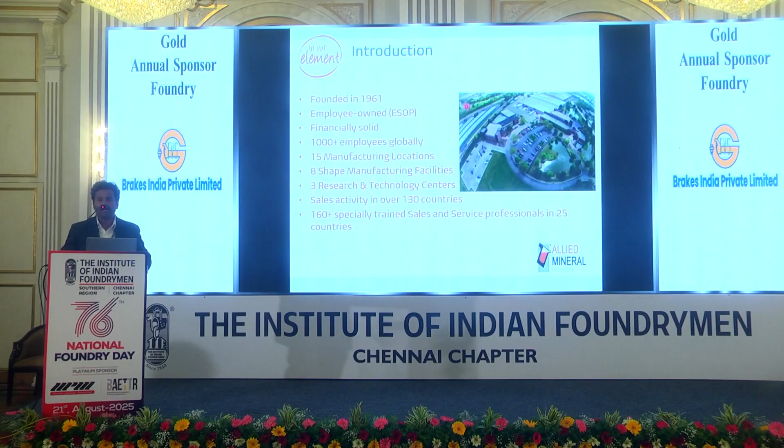To brief about Allied Refractory Products - Allied Refractory Products is a wholly owned subsidiary of Allied Mineral Products USA. It was founded in 1961, it's an ESOP company and financially solid. We have more than 1,000 employees globally, 15 manufacturing locations and 8 shape manufacturing facilities, and 3 R&D facilities. We have sales activities over 130 countries, and almost 160 trained sales and service professionals across the globe.

So what are ladles? Ladles are pieces of equipment used to hold and transfer liquid metal. Traditionally, these ladles are not given much importance, which they should be given. These ladles are often lined with traditional practices like bricks and mortars, sand and sodium silicate, sand and CO2, and sometimes fire clay.

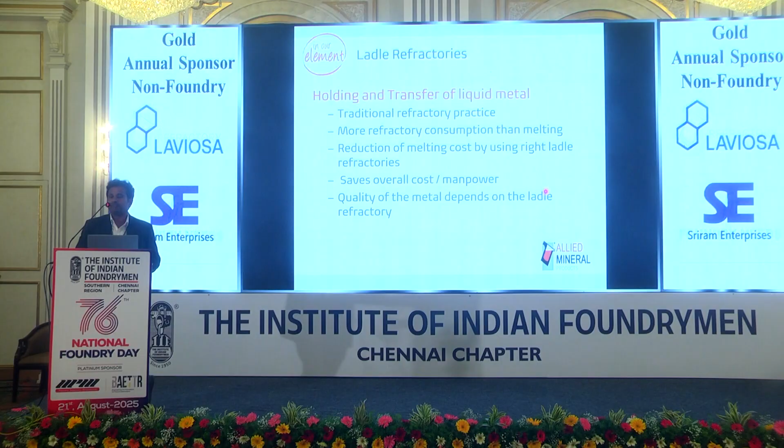If you see, more refractory consumption takes place in the ladles compared to your induction furnaces. If we actually concentrate on these ladles, we can save a lot of overall cost, we can reduce a lot of manpower, and in fact we can increase the quality of metal because the ladle is the last point of contact of your metal before the molds.

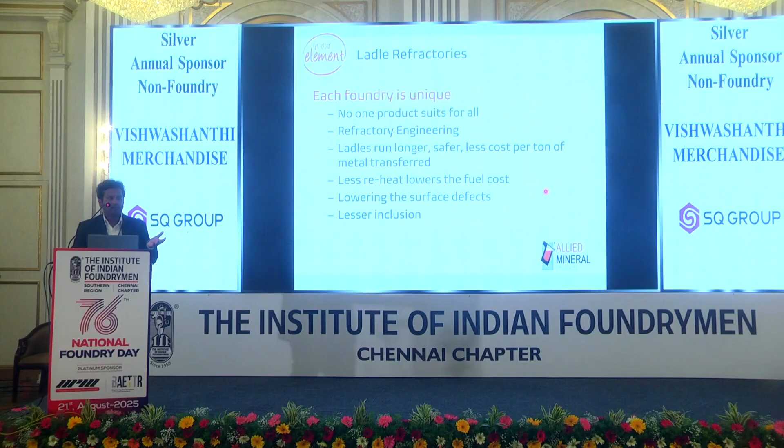Each foundry is unique, so there is no one product that suits all. Let's say you have a different kind of metal - you need to use different refractories according to your metal chemistry, slag chemistry, and operations. These refractories have to be engineered properly to run longer, to run safer, and at less cost per ton of liquid metal transferred. Further, it has to have less reheat, which lowers your fuel cost, lowering surface defects and inclusion defects in your castings.

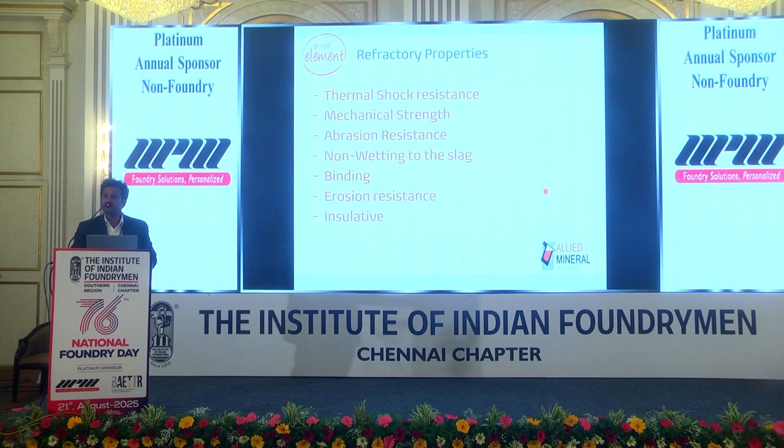In the next segment, we'll see the main important parameters or properties required for your ladle refractories. The first ones are thermal shock resistance and mechanical strength, abrasion resistance, non-wetting properties, binders, erosion resistance, and insulation properties. We'll see each property in detail.

Thermal shock resistance is the first and foremost important property of your ladle refractory. When you consider the induction furnace, as soon as you tap out the metal, it is always in hot condition. Whereas in the ladle, you will be transferring the metal and the ladle will be idle, exposed to the atmosphere. There is a huge, enormous amount of thermal shock involved compared to the induction furnace, so our refractory should have more thermal shock resistance. Thermal shock resistance is nothing but a property to withstand sudden and rapid temperature change without cracking or failing.

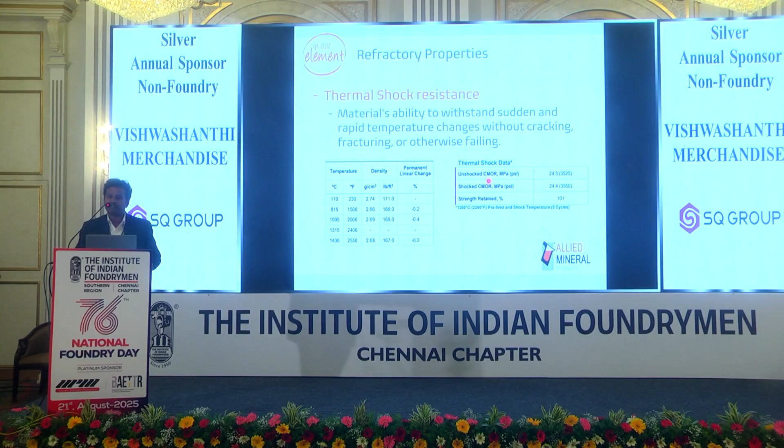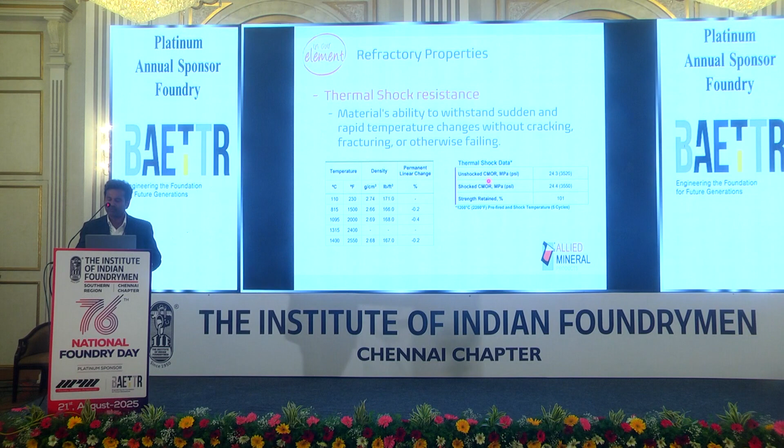There are two data points in the properties to know whether a product is thermally stable or not. One main property is the thermal shock data. Some products are given this data directly, some may not be, so we have to indirectly interpret whether the product is thermally stable. One particular parameter is the unshocked CMOR - MOR meaning modulus of rupture, which is a property of a material indicating the maximum tensile strength it can withstand upon bending. This test can be done either in cold or hot condition.

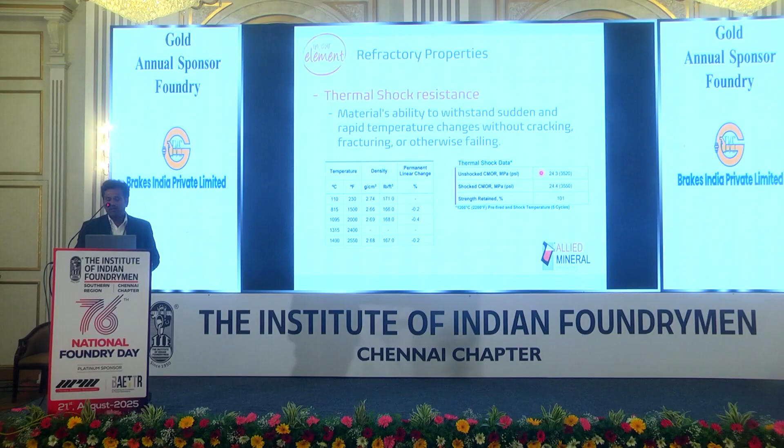This sample has been analyzed unshocked and has a CMOR of 24.3 megapascal. This specimen has been cycled 5 times around 1200 degrees Celsius, and again this test was conducted to see the MOR. The difference is not much, meaning the product will withstand thermal shock - the strength retained is almost 100%. So this product is thermally stable.

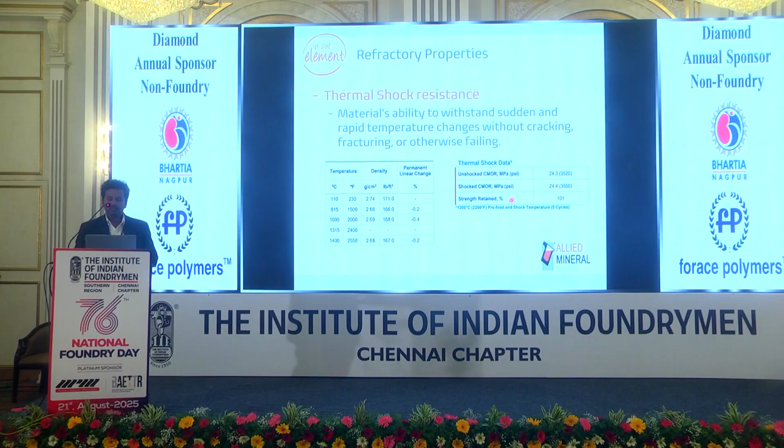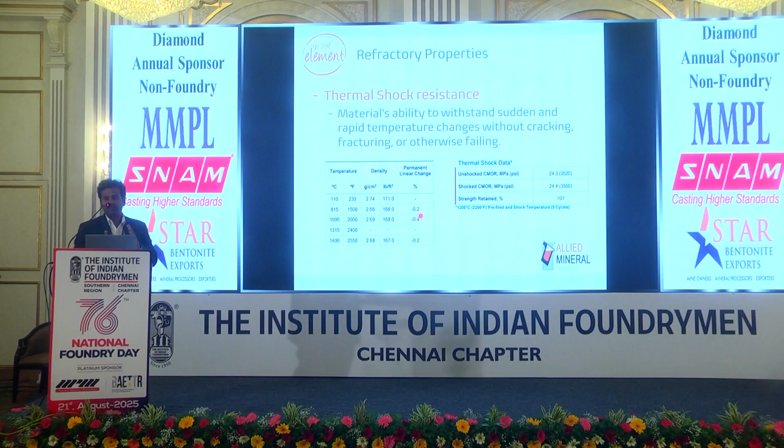If you don't have thermal shock resistance data, we can indirectly derive it from the permanent linear change data. If you see this particular product around 815 degrees Celsius and 1095, the permanent linear change is negative 0.2 to negative 0.4. Generally, a product is stable if this difference in permanent linear change is less than 0.3 - here it's just less than 0.2, so this product will perform better. This is the indirect way of deriving thermal shock resistance.

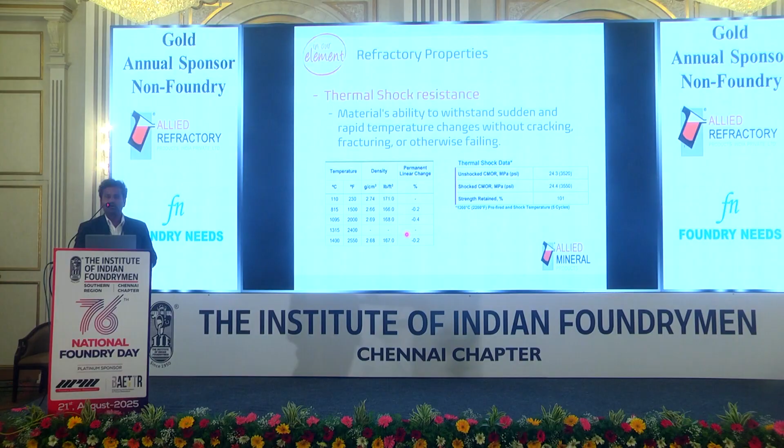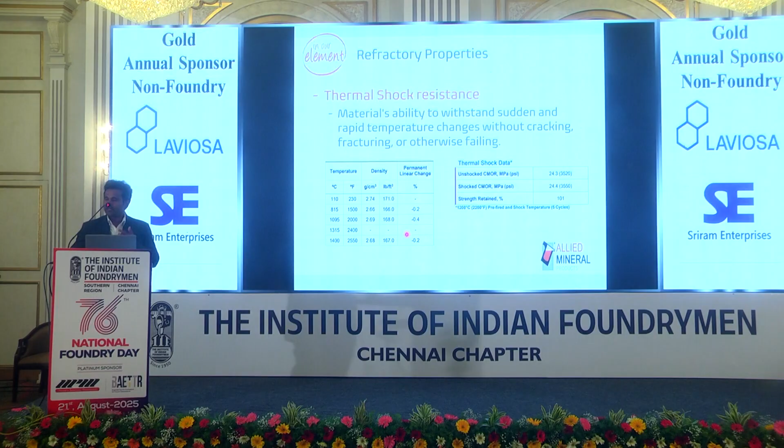Our traditional refractories like bricks and mortars - basically bricks have many joints, 6 joints. When you do the thermal shocking, these joints have a chance of opening up and metal can get penetrated through them. So we need a proper engineered refractory system in the ladles which can sustain this thermal shock, along with good mechanical strength.

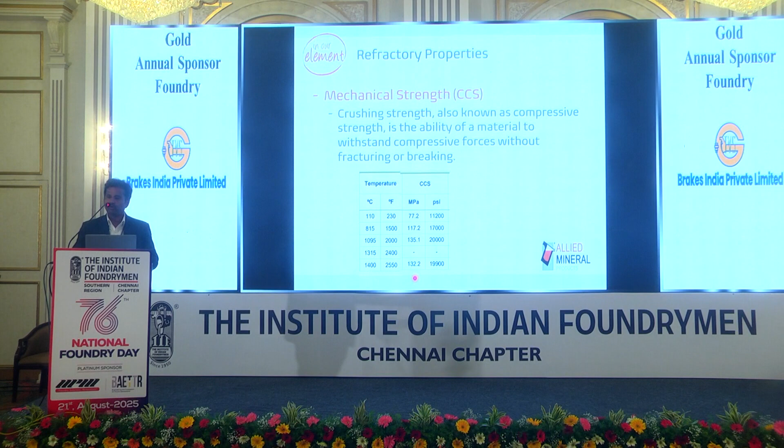This mechanical strength can be calculated from cold crushing strength. CCS is known as compressive strength - the ability of a material to withstand compressive force without fracturing. If you see this particular product, it has the highest cold crushing strength around 1095 degrees Celsius, around 135 megapascal. So we can analyze whether this product is mechanically strong, because ladles of bigger sizes like 5 ton, 10 ton, 20 ton and so on hold a huge amount of metal. It has to have good mechanical strength to hold that particular amount of liquid metal.

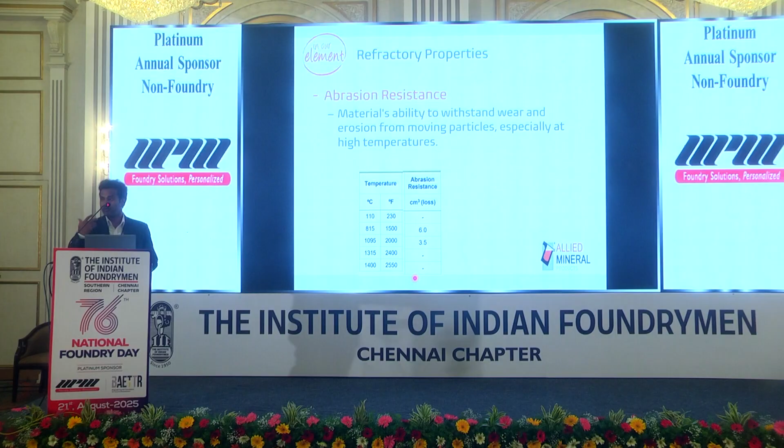The third property is abrasion resistance - the material's ability to withstand wear and erosion from moving particles, especially at high temperature. These ladles generally get a lot of abrasion to remove slag deposited in them, and sometimes if metal is getting solidified, you have to give a lot of abrasion force to remove the solidified metal. So this product has to have good abrasion resistance. In general terms, this abrasion loss will be given in the data sheets - if it is less than 6, it's considered a good abrasion resistant product.

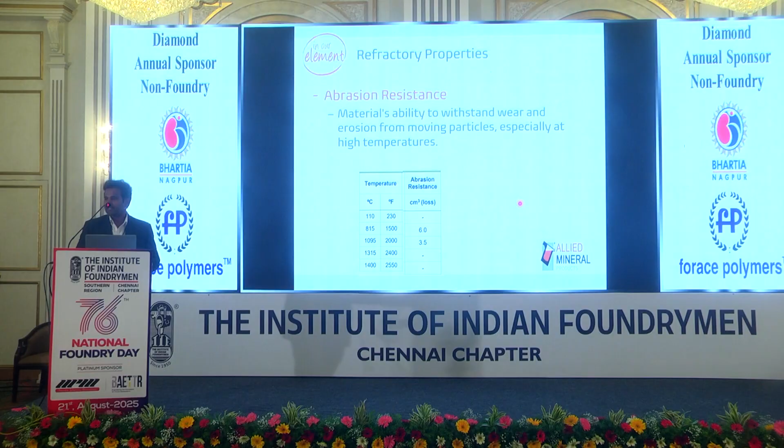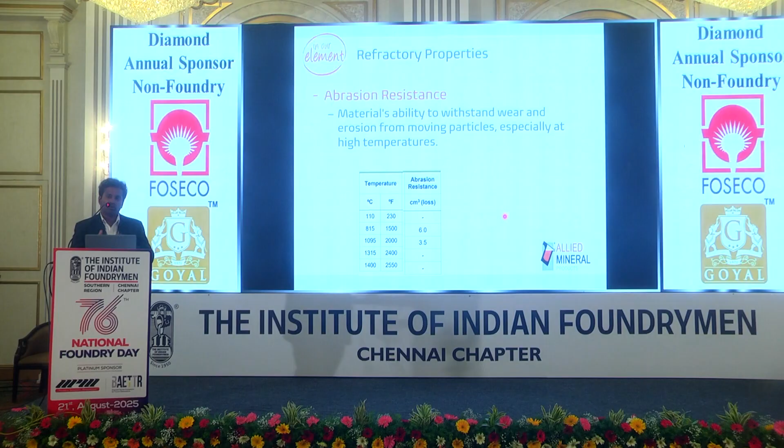Sometimes all the important data parameters may not be given in the data sheet, so we have to correlate with other properties to get an idea. You can correlate abrasion resistance with cold crushing strength - if this product has higher cold crushing strength, it is directly proportionate, meaning it has good abrasion resistance.

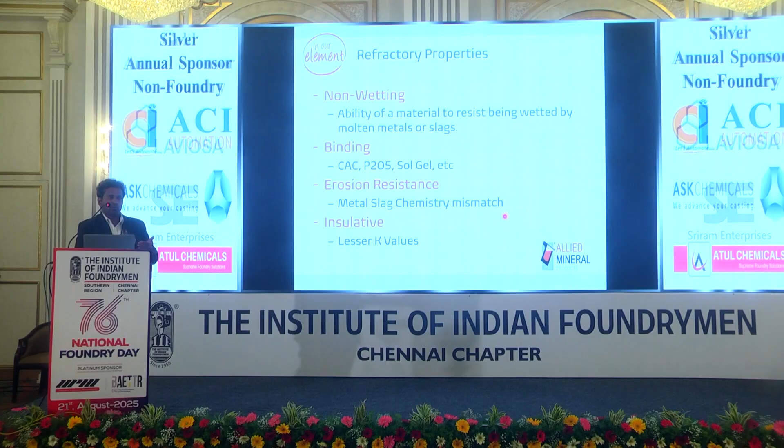So another major important property is the non-wetting agent. Apart from the aggregates, there are certain additives being added to the refractory system which resist the liquid metal or the slag from adhering to the main working lining, so that you will have the same volume of your ladle for a longer period of time.

Another property is the binding agents. What kind of binding system are we using in your ladles? Either it's a calcium aluminate cement or phosphate bonded, or sol-gel technology like colloidal silica, etc. These binders are important because it depends upon the application. For example, you're going to patch your ladle, and it has already been lined with a calcium aluminate system.

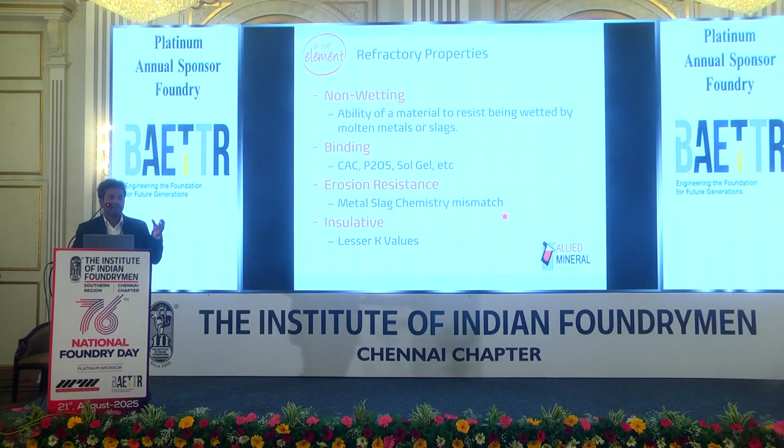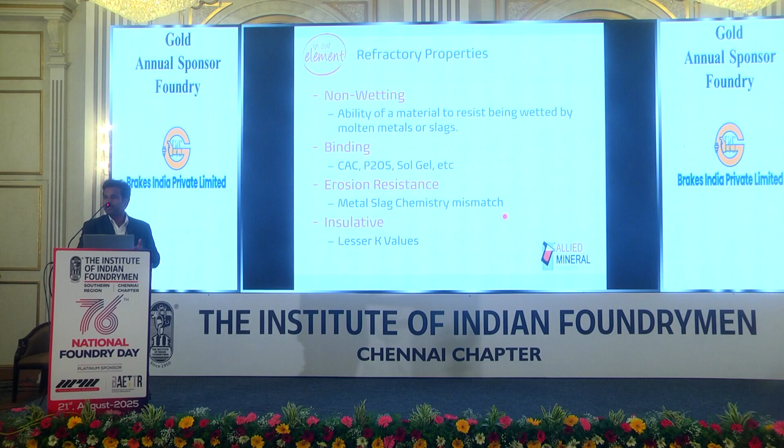You cannot again use the calcium aluminate system for patching purposes, because already fired, dried refractory will not adhere to the new castable system. So in that particular case, you have to use a phosphate bonded system, which will adhere to the old dried refractory in a much better way compared to the calcium aluminate cement system.

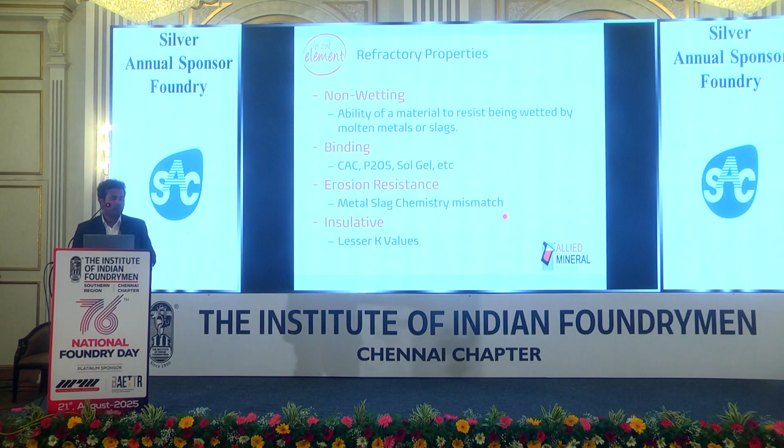Another property is erosion resistance. Your refractory should not erode either in a chemical way or a mechanical way. If you are using a bigger ladle, like 5 or 10 ton capacity, the liquid metal stream will be falling from about 3 or 4 meters height, so the bottom of your ladle gets eroded faster. So your refractory should have better erosion resistance.

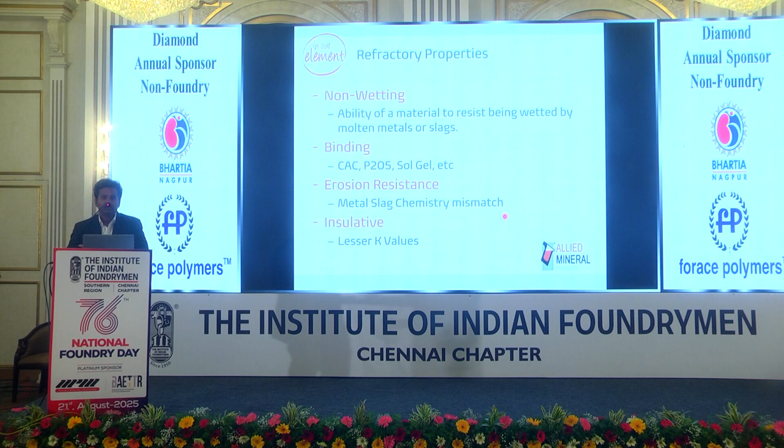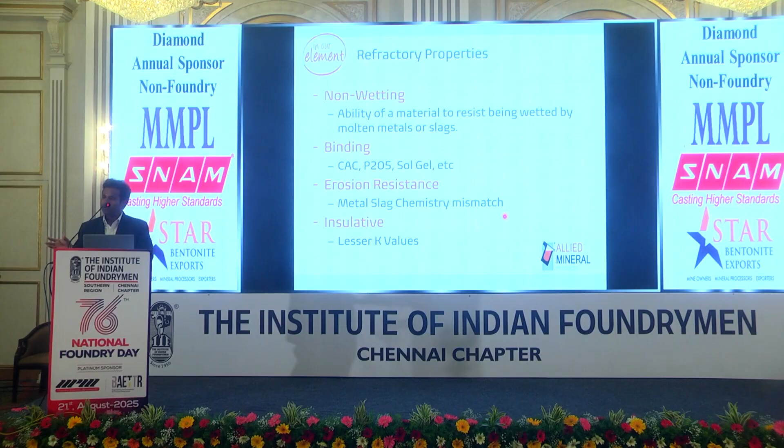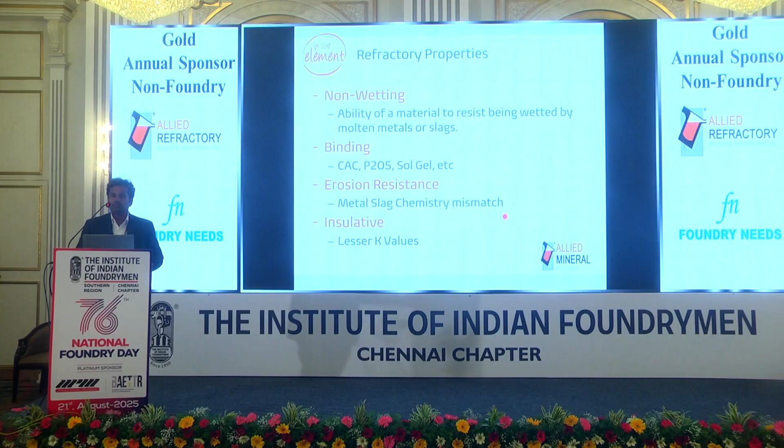Generally speaking, if you have a silicon carbide additive in your refractory, it will have better abrasion resistance and mechanical erosion resistance. You also have to use a refractory which is compatible with your metal chemistry. You cannot use a chemistry which is not compatible with your metal and slag, otherwise you will have chemical erosion. And obviously, your refractory should have a very low K value so that your ladle can hold the temperature for a longer period of time.

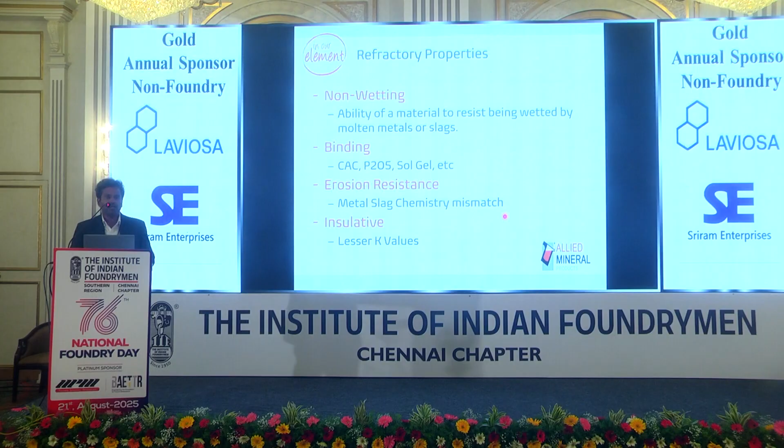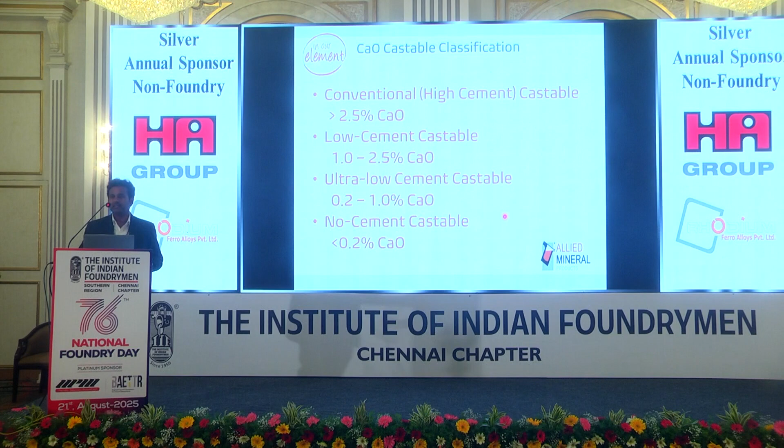So far, we have seen the main important properties required for ladle refractories. Now we'll see the classification based on cement content. For a long time, people have used high cement castables, called conventional cement castables, which have more than 2.5% calcium oxide. This is very easy to use, and people are very fond of it. They can mix it with any amount of water and easily trowel it onto any surface. As I said earlier, there is no one product that suits all applications.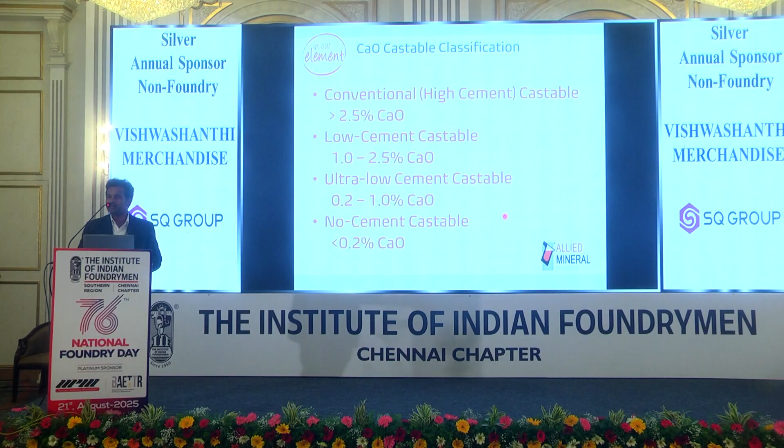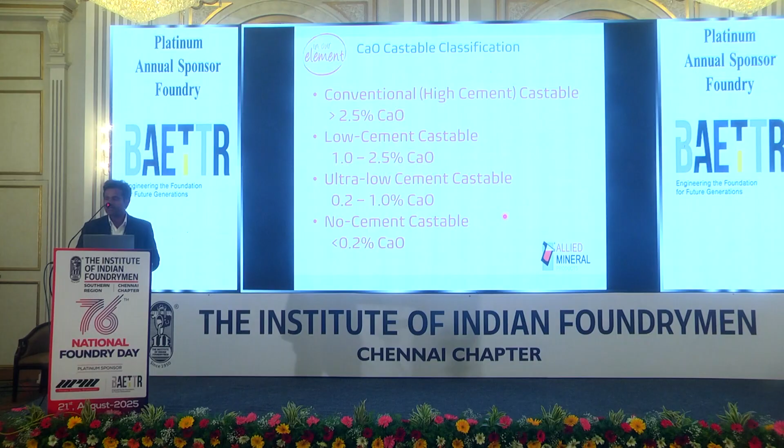The second is low cement castable, which has very little, like 1 to 2.5% calcium oxide. It takes very minimal water. There is another category called ultra low cement castable, which is about 0.2 to 1% calcium oxide. And the final category is no cement castable, which uses a completely different binding system like phosphate bonded or colloidal silica.

High cement based castables require less intensive mixing and a high level of cement. When the cement level is high, obviously the water percentage will be more. So the density goes down, and a lot of water is in the system. It's always difficult to remove all the water from the system, and it has very low strength.

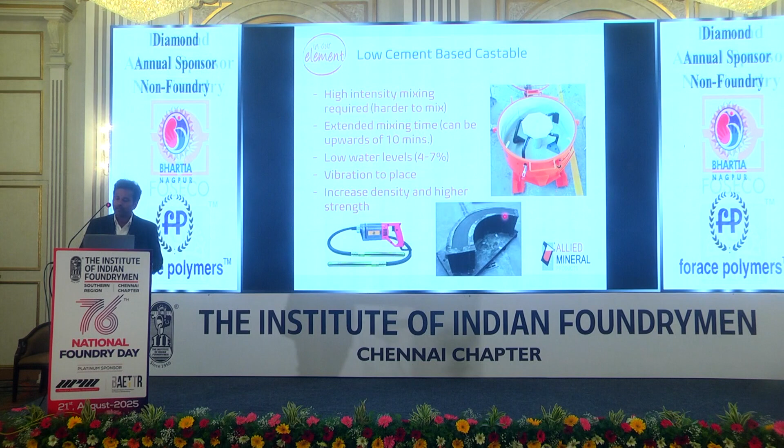On the other hand, the best suitable system for your ladle refractories is low cement based castables. Even though it requires some specialized equipment like a pan mixer and needle vibrator, the product has to be installed the way it has been designed. Certain products are designed only for vibration casting, and if so, it has to be used with a pencil or needle vibrator.

Compared to high cement refractories, low cement refractories need a shear force to mix properly. That's the reason we always recommend a pan mixer. It cannot be mixed by hand. When you try to mix a low cement castable by hand, you tend to add more water, which ultimately reduces the density of the product, reduces the strength, and gives a shorter lining life.

This chart gives a general idea about the cement percentage, porosity percentage and strength. High cement has a very high porosity level and very low strength: 15 to 30 megapascal, and 3 to 7 megapascal modulus of rupture at 1100 degrees Celsius. Low cement has 70 megapascal, and with ultra low cement you can achieve strength up to more than 130 megapascal.

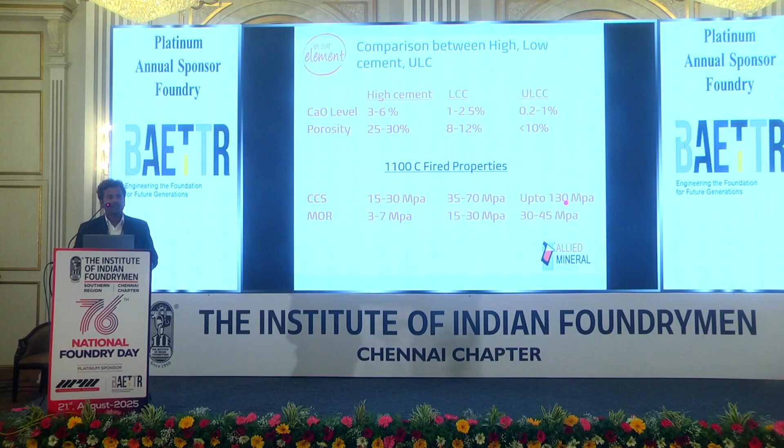At the same time, we cannot use ultra low cement for all applications, because it contains special raw materials and special additives, so it may be expensive. We have to think and decide the product according to the needs.

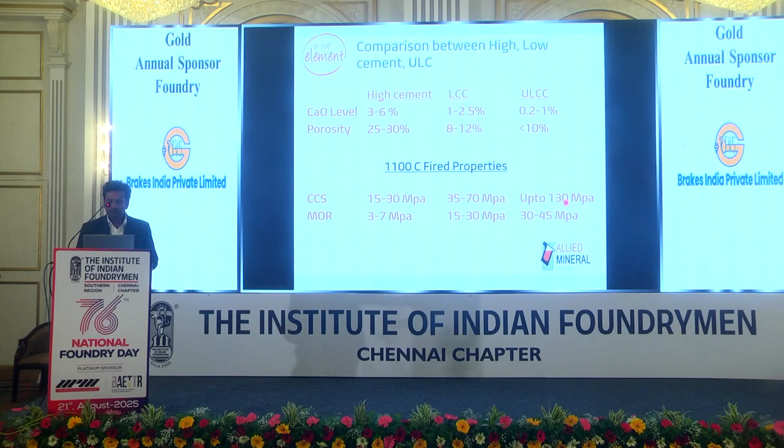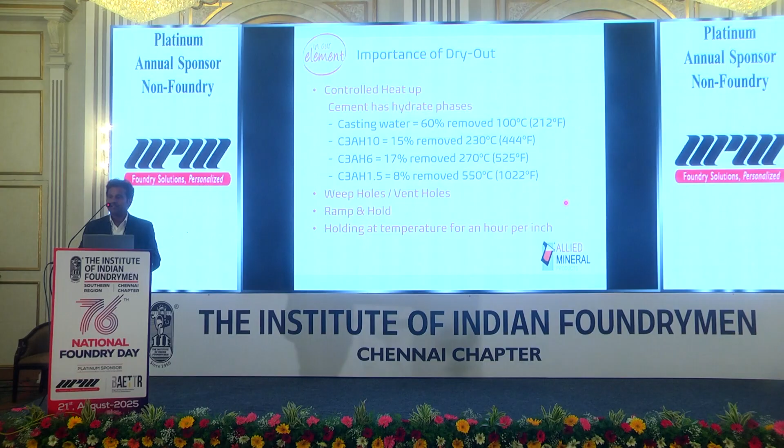When you see the calcium aluminate cement based castable system, one major part is the dry out. Whatever water we add has to be removed without damaging the refractory system. The physical water we add, 4 to 7% in a low cement system, will come out around 100 degrees Celsius as water vapor. But it is not the same. Traditionally, people used wood firing and some other systems, but it is not sufficient to drive out all the moisture.

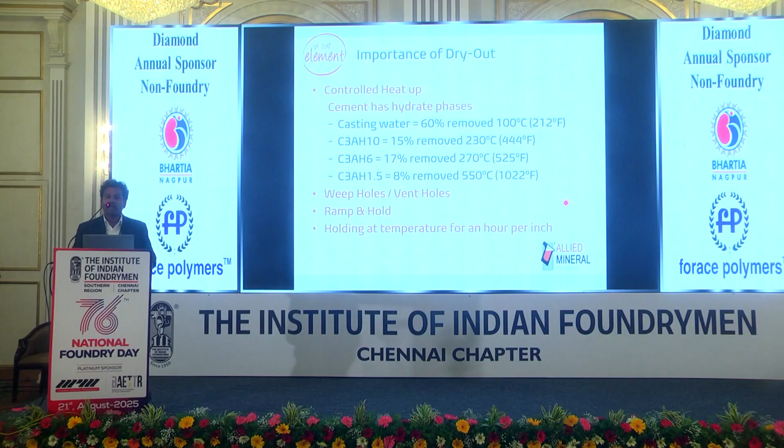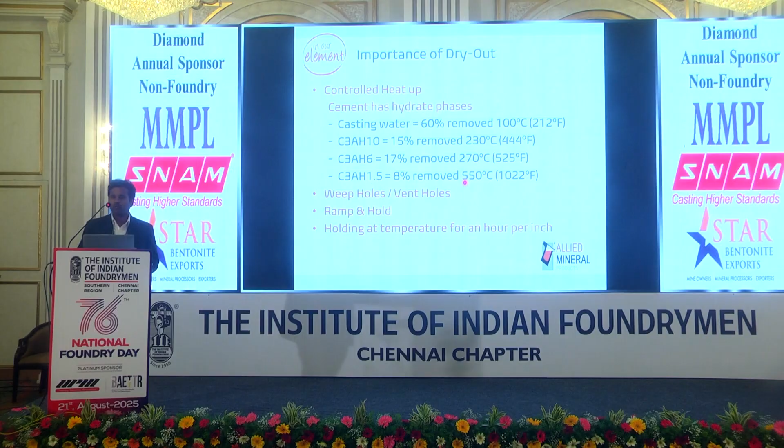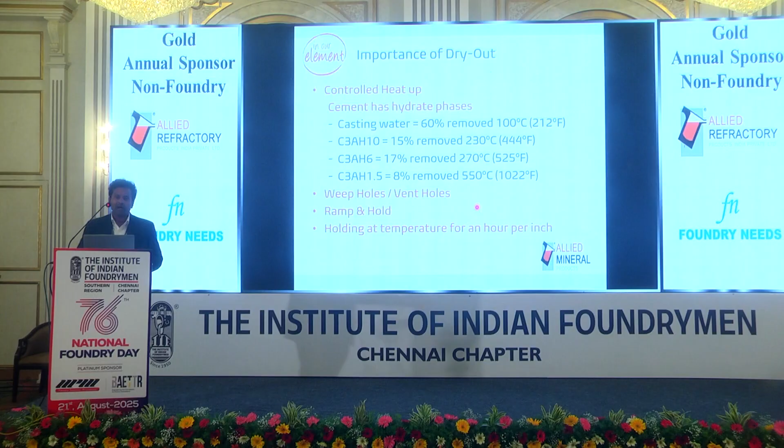When the water is added into the cement, it forms hydration phases, so the complete chemical moisture will come out only after 550 degrees Celsius. So your ladle has to be heated to a minimum of 550 degrees Celsius, and according to your lining thickness, the ramp and hold system has to be designed. Let's say you have 4 inches of lining thickness. Your hold should be 4 hours at individual levels like 120, 240, 360 and 550 degrees Celsius. And we need proper vent holes in the ladle shell. This allows the moisture to escape without damaging your refractory system.

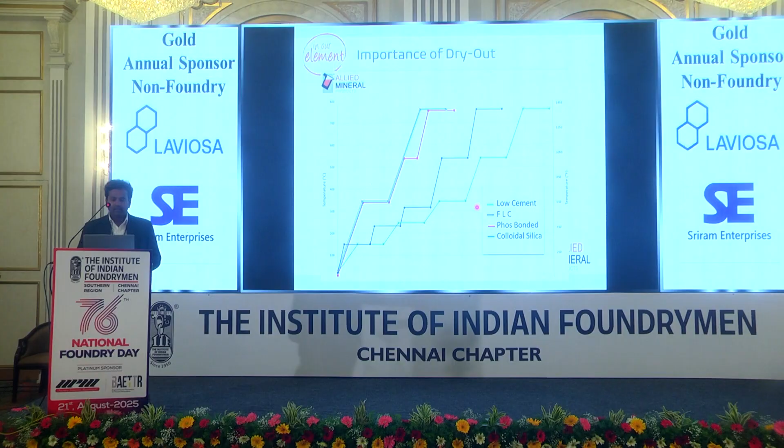This chart gives a fair idea of the cycle generally followed based on the different types of binding. Here you can see the green shows low cement castable, which has the highest number of hours of dry out, compared to phosphate bonded or colloidal silica, which has about half the dry out time.

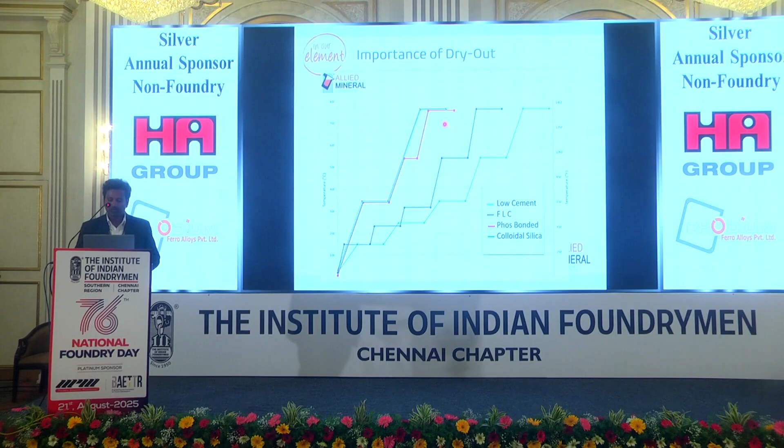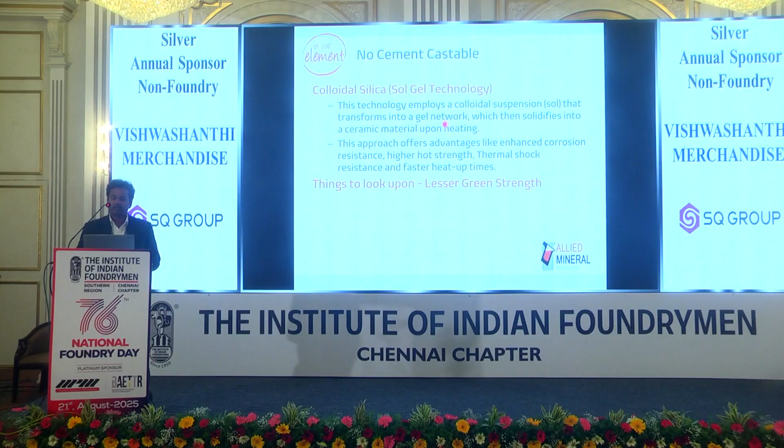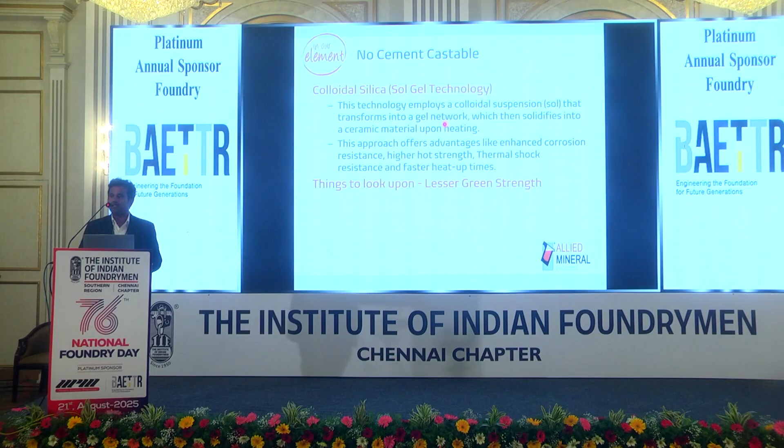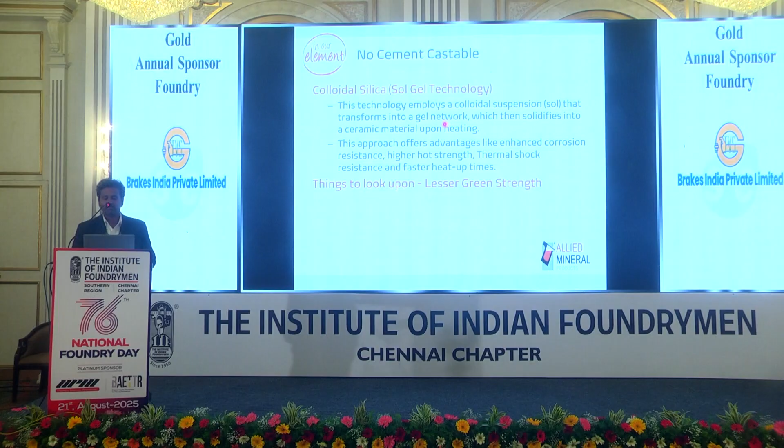Next comes the no cement based castable. It can be either phosphate bonded or colloidal silica technology. This technology employs a colloidal suspension, like colloidal silica, that transforms into a gel network, which then solidifies into a ceramic material upon heating. It has suspended silica particles at the nanometer level in a solution, and upon heating it attains strength. This has a drastic advantage compared to the traditional cement-based system: very high hot strength and very high thermal shock resistance.

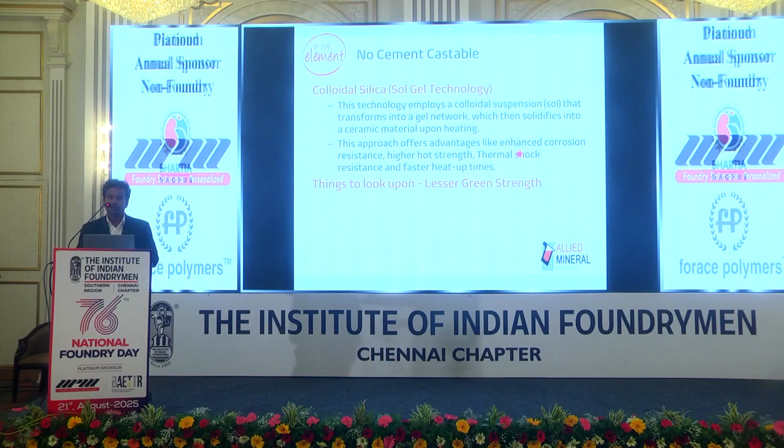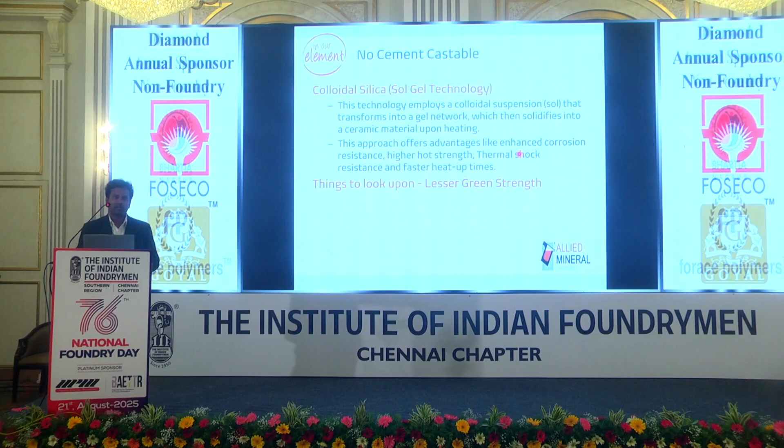The one thing we have to be very careful about when we use this colloidal silica-based system is that it has very low green strength. When you cast the ladle, you are not allowed to mechanically impact the castable because it has very low strength. Once it is heated, it has enormous strength. That one particular point we have to remember when using a colloidal silica-based system.

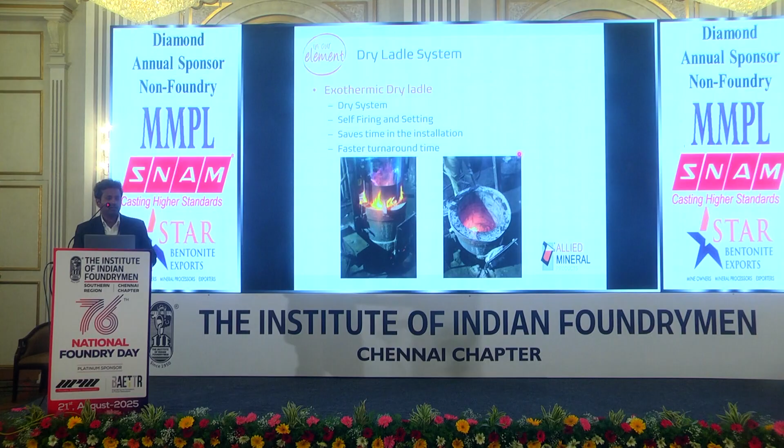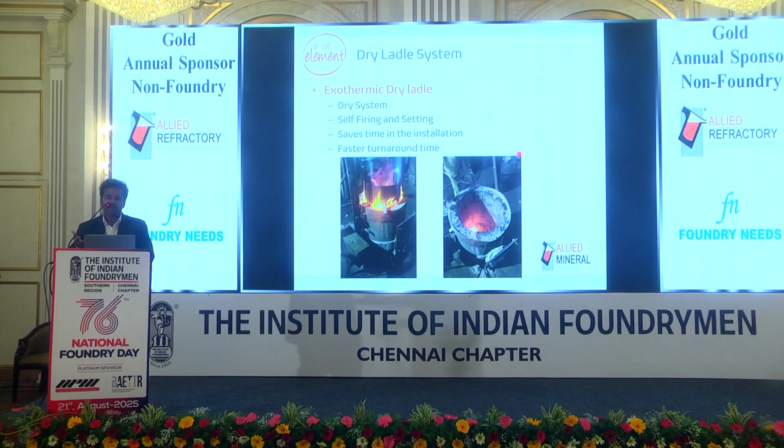Next comes a completely dry system. Depending upon the requirement, we can select the refractory accordingly. This system contains special additives which can be self-firing. You have to line your ladle the same as your induction furnace: fork, compact, and bring it up in layers. After you finish, you ignite the former either by torch or wood firing. The self-firing additives activate, fire and harden the material, and it gets sintered. Within 3 to 4 hours your ladle is ready to go. You can preheat the ladle and pour the metal in it.

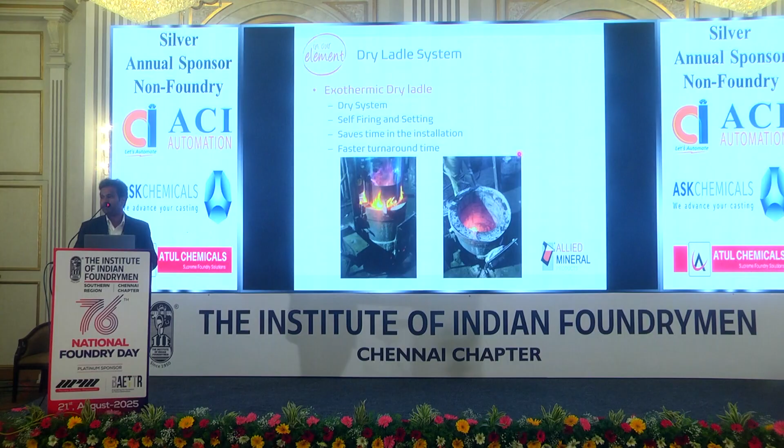We have covered the basics so far, and now we'll see the types of ladles and pouring systems. Everyone is aware of the different types of treatment ladles: wire treatment, pocket type, segment type, auto pour or GF converter, etc. Pouring ladles are basically either lip pour or teapot spout. The teapot spout is further classified as 90-degree or 45-degree. Steel ladles generally have a 90-degree teapot spout, and iron foundries have pouring ladles with a 45-degree spout. Then there are hand shank ladles, bottom pouring ladles, and tundishes.

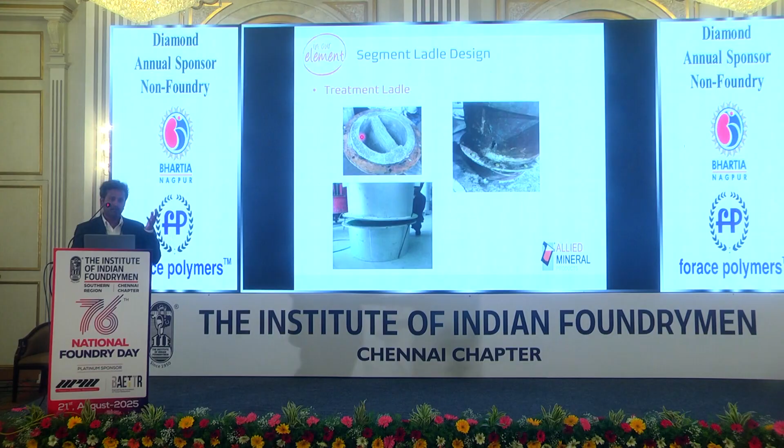Now we'll see some design parameters and how we can improve productivity. The treatment ladle is generally designed so that the diameter to height ratio is 1:2. So if it is 500 millimeter diameter, the ladle will be 1 meter high. It will always be difficult to maintain the pocket area or treatment area. Because the height is more, a person cannot go inside and do the refractory repair work. Moreover, the exothermic reaction happens in this treatment segment.

So what we can do is segment the ladle into 2 pieces. We can have a separate treatment pocket and attach it to the upper shell. In this way, we have proper access to the treatment zone for repair, and moreover, we are able to repair the upper case easily as well.

So even though the ladle is good, because we are not able to maintain it, the whole complete refractory has to be demolished and relined. So in this way, we can avoid a lot of downtime. We can have a spare pocket area separately and get it ready. As soon as you remove the old one, you can attach the new one, and your ladle is good to go.

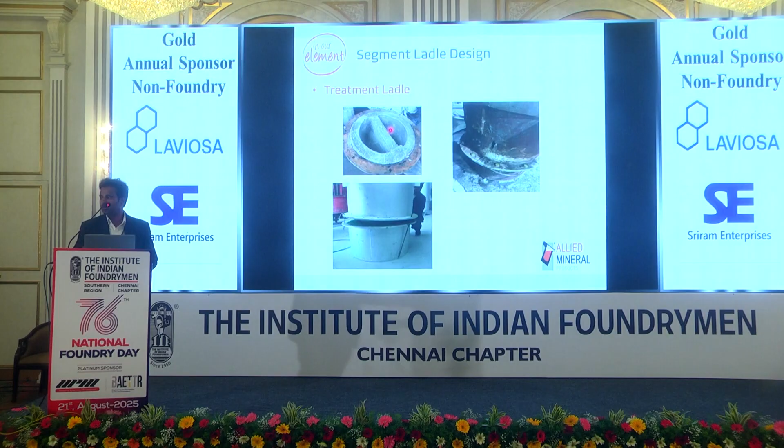And the same system for your pouring ladle. A major bottleneck comes when you use the castable system in your pouring ladle, because your spout diameter will always be smaller to have less heat loss. But this smaller spout diameter always has a chance of getting clogged either by slag or solidified metal. You can have a spare spout whenever there are issues. You can just remove it, attach the new spout and go.

And this is another design for steel ladles. Generally, steel ladles have a 90-degree spout. The same situation happens here also. Only for this particular area, people will be demolishing the complete ladle. So we can have a slight modification in the ladle. So we will have some slot like this.

So this particular area can be casted separately, and this segment we can try to give as a precast or some dam design. You can place it on top of the existing ladle, and whenever there is a problem in the spout, you can just remove this particular dam and replace it with a new dam. So in that case, we can save a lot of castable.

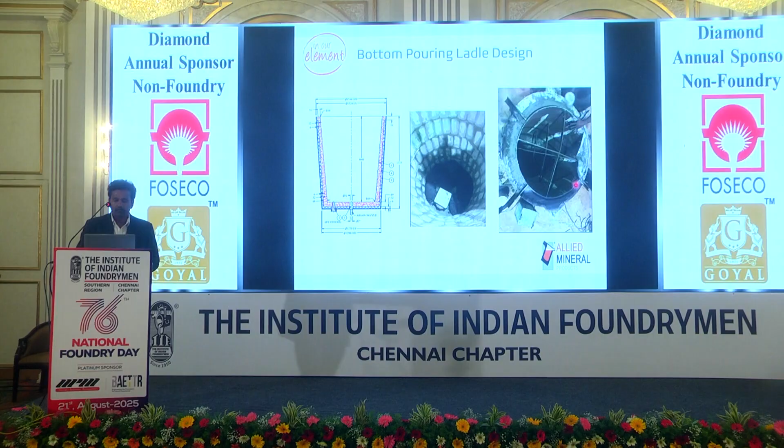And this is the bottom pouring ladle design. This is our traditional way of designing the ladle. We'll have ceramic fiber paper at the shell, and depending upon the need, we'll go with either insulation bricks or super duty bricks as a backup, and then 80% alumina castables like LCF 384 for the steel ladles. So this is the way of lining.

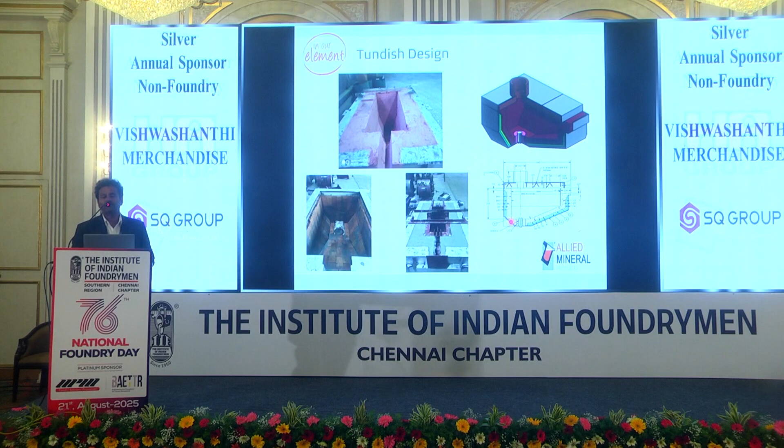So now we'll have a look at tundish design. The same way, the tundish is also used to transfer the metal. Metal will be continuously held in the tundish, and there is always abrasion happening in the tundish. So the tundish also has to be designed according to the needed properties. We can go with ultra low cement castables like VCAS 426, which has silicon carbide, which will help with abrasion loss, and it gives a non-wetting property so that buildup will not happen in the tundish system. So these are certain pictures of how we do the tundish.

So now we'll look into real life case studies. Case study 1 consists of the same tundish. The objective is to run the tundish for a 6-day stretch instead of stopping for a tundish change every 3rd day. This customer was pouring SG, and there used to be a buildup in the nozzle area. So every 3 days they used to bring the tundish out and put a new tundish back in the line. Every time they do this process, they lose around 1.5 hours changing the tundish, which is around 50 tons of production loss.

The earlier material they were using was conventional castables, and we changed it to an ultra low cement castable with 12% silicon carbide. By just changing this, we were able to achieve a complete 6-day stretch without stopping at 3 days. Productivity was increased. Not only was productivity increased, we have been cost effective as well.

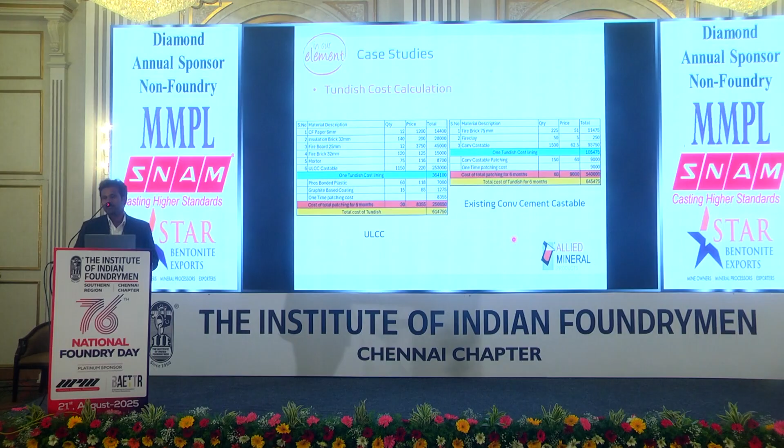We generally say price versus cost. When we are buying certain items, we don't need to look at the initial cost of a product. We need to see the overall ownership of a product. Let's say we buy a shirt of 1,000 rupees, but you keep on spending money repairing it. You have to consider the overall cost of ownership instead of just the initial cost.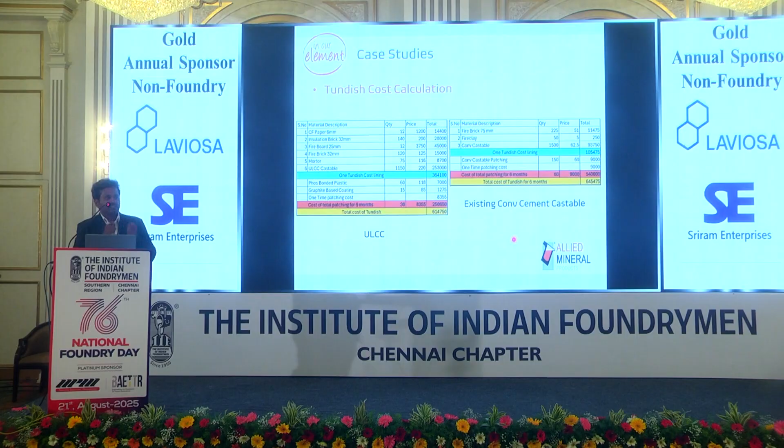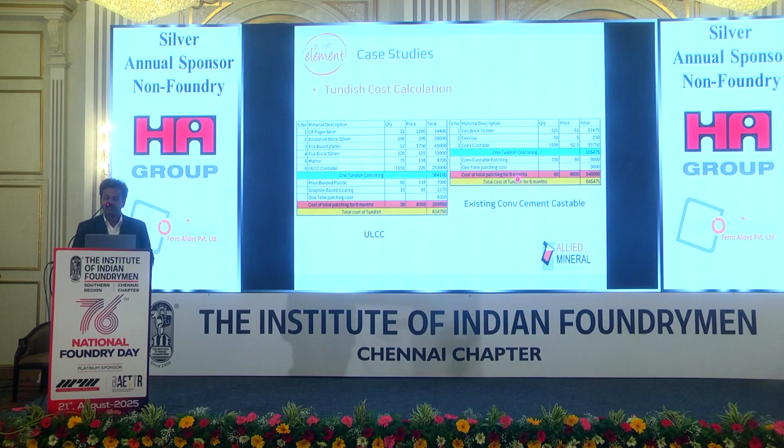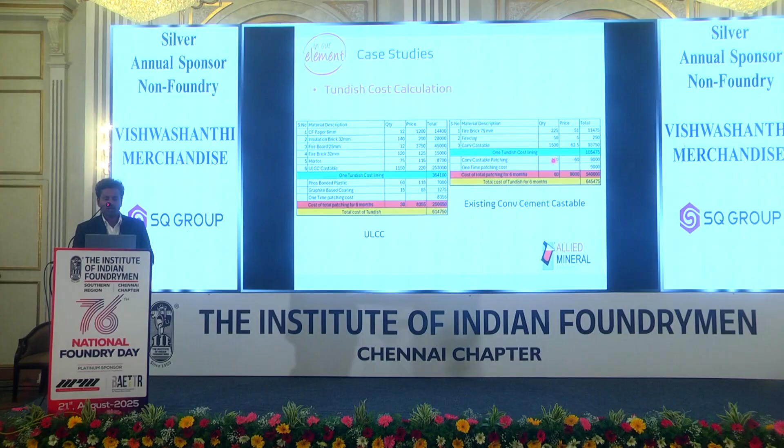So the same way, their initial cost was around 1 lakh rupees in their method, and our cost was around 3.6 lakhs. They used to patch around 150 kgs of their regular patching material, which comes to around 9,000 rupees. And their total cost of patching for 6 months is around 5,40,000 rupees. So their total cost of a tundish for 6 months is around 6,45,000. Whereas our patching is almost half, so it is around 8,14,000 rupees. So not only did we increase productivity, we were cost effective as well in the long run.

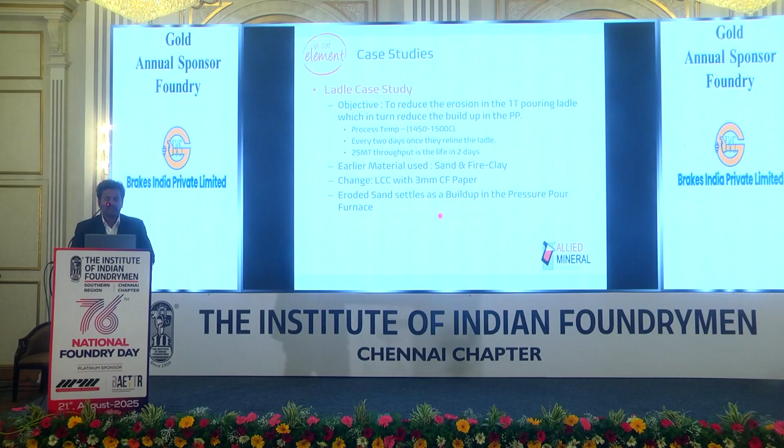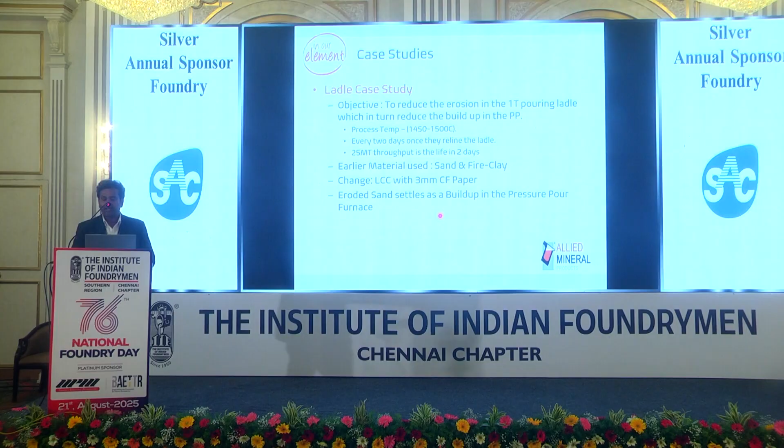And this case study is for a pouring ladle, to reduce the erosion in a 1T pouring ladle, which in turn reduces the buildup in the pressure pour. The processing temperature is 1450 to 1500 degrees Celsius. The life of their existing ladle is only 2 days, which is around 25 metric tons. Earlier they used sand and fire clay, and we changed it to low cement castable with ceramic paper.

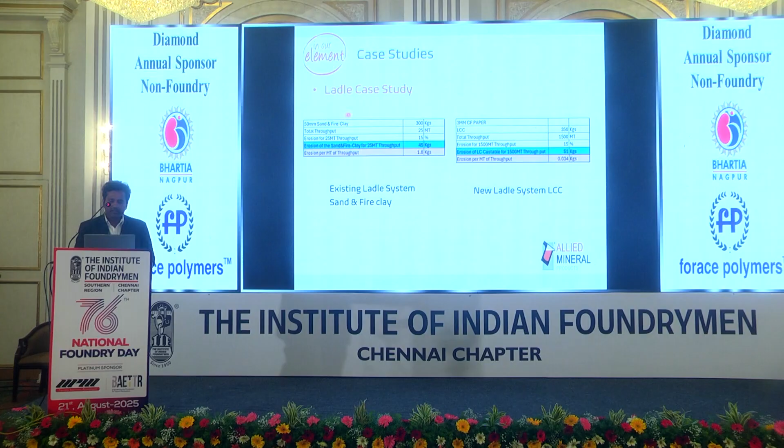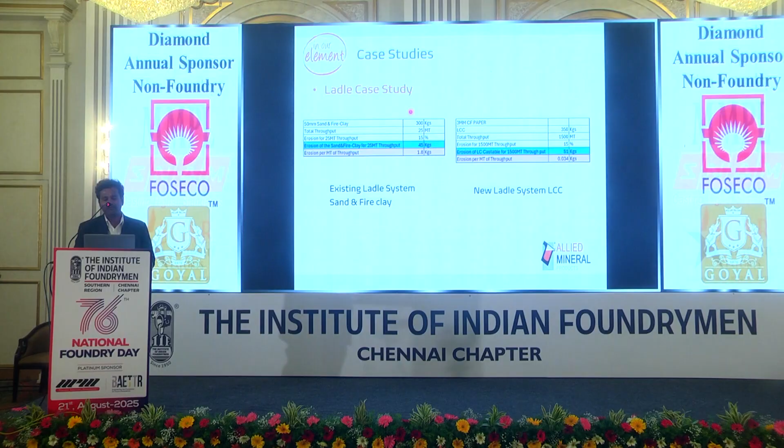Obviously, when the refractory system is getting eroded, it goes into your holding furnace or pressure pour system, which you may not be able to remove completely. So it acts as a build-up to your receiving spout or throat. So here in their existing system, they used to use 300 kg of sand and fire clay. Their total throughput is only 25 metric ton. The erosion after 25 metric ton is like 15%, which is like 45 kg of sand. So erosion per metric ton of throughput is like 1.8 kgs.

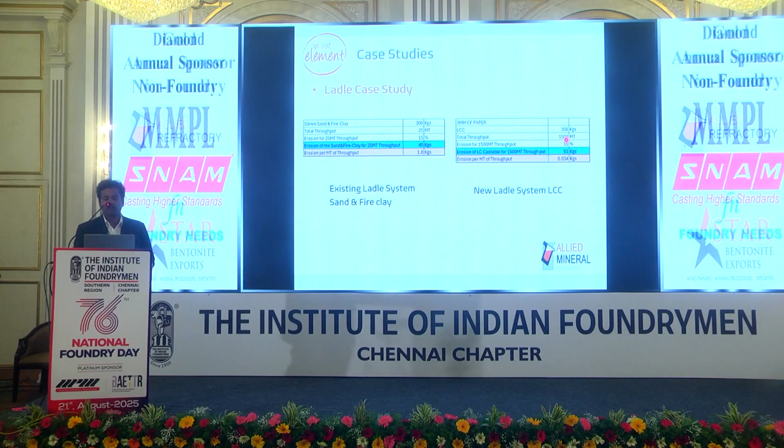After converting into low cement system, their lining life is like 1500 metric ton. Compared to 25 metric ton, the life was improved to 1500 metric ton. So the erosion per ton is only 0.034 kg.

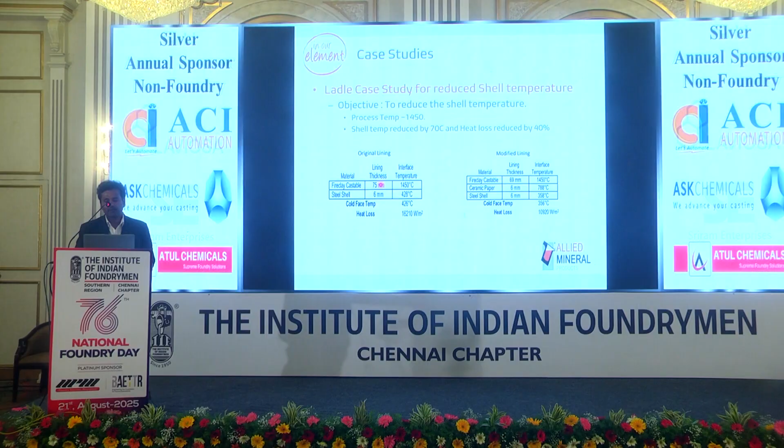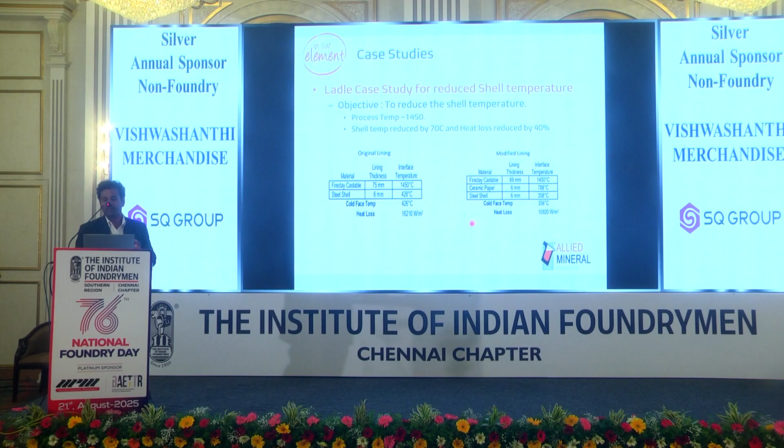And this is just a simple modification which can help you in heat loss. This is a lining thickness of around 75 mm directly onto your shell. So if your hot face temperature is 1450, if you don't use any insulation as a backup, you will have a cold face of 426 degrees Celsius, and heat loss through the refractory system is 16,210 watt per meter square. If you just incorporate 6 millimeter ceramic fiber paper, your cold face temperature can be reduced to 356 and heat loss can be reduced up to 40%. Just by changing a paper, you can save an enormous amount of heat which is transferring through your shell.

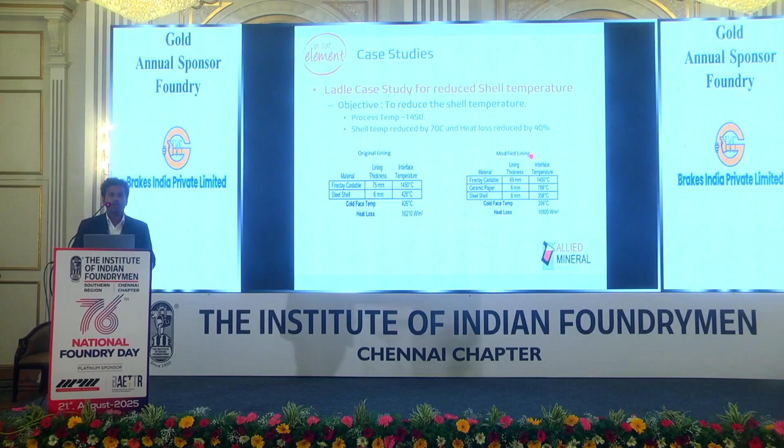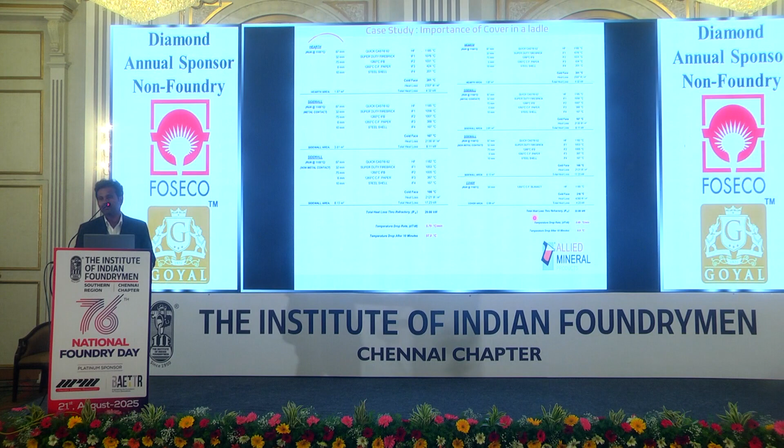So generally we say the loss through radiation heat is more compared to the conduction through the shells. More than 80% of losses are through the top. So this has to be addressed in order to have a better heat efficient refractory system. So with this I conclude my presentation. If there is any question, I'll be happy to answer.